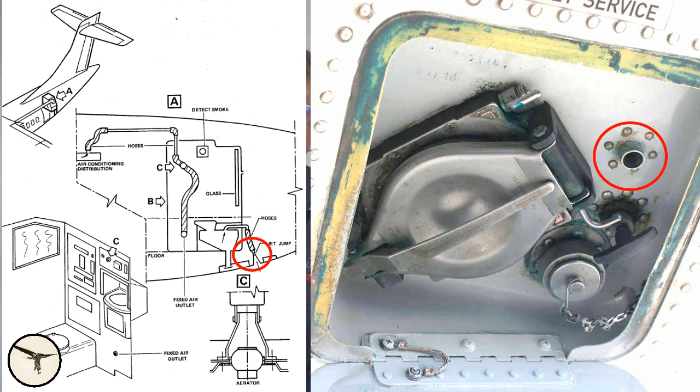We start with the ventilation system. It's totally independent of the air condition and the pressurization systems. The following areas are ventilated: flight compartment or cockpit, forward cargo compartment, avionics compartments, battery compartments, and the lavatory. Starting with the lavatory, it has a duct leading to the atmosphere. When the cabin is pressurized, air is vented out through this duct, eliminating any odors.

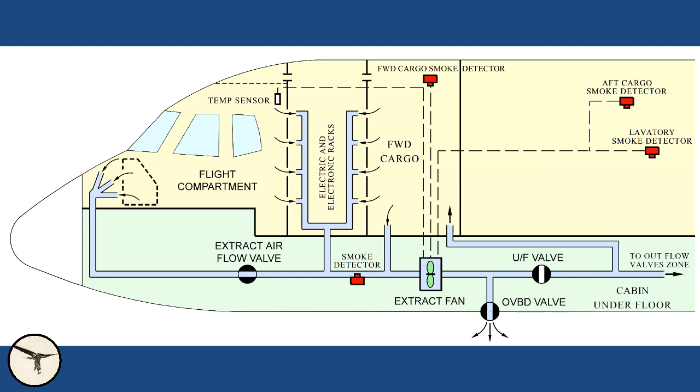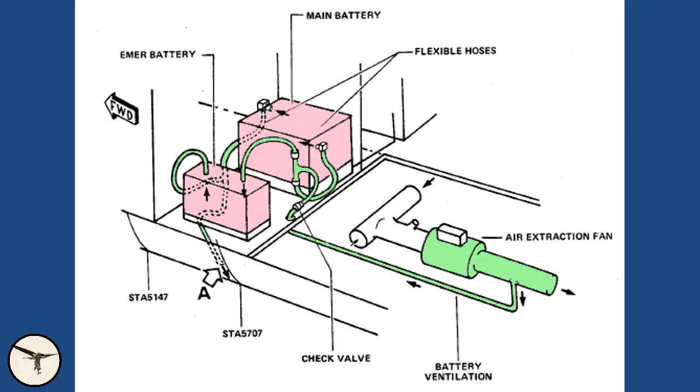Ventilation of the forward part of the aircraft is provided by a fan called the extract fan, which extracts air from the flight deck, forward cargo compartment, and avionic compartments. The extract fan pushes air into the battery compartments via a duct, and from there the air and any fumes from the batteries are discarded into the atmosphere through a tiny hole behind the oxygen bottle discharge indicator.

The job of the extract fan is to keep the avionics cooled. The fan speed is variable. It runs at minimum speed when the temperature in the cockpit is below 20 degrees, and at maximum speed when the temperature is above 52 degrees.

Downstream of the extract fan there are two valves: the overboard valve, which discharges air overboard, and the underfloor valve, which transfers air to the area under the cabin floor. From there, the air enters the recirculation fans or is discharged overboard by the outflow valves, which are controlled by the pressurization system. I will come back to that soon.

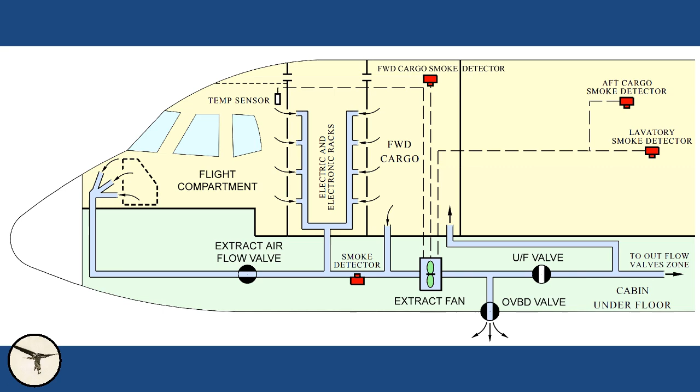The extract fan is very strong. When the overboard valve is open, you must remember to keep the communication hatch open before the cabin door is closed. Otherwise, the extract fan will create a strong suction that will pop your ears when the door is closed. When the doors are closed and the communication hatch is open, the extract fan will cause a strong airflow through the communication hatch. It's pleasant when it's warm outside, but less comfortable when it's minus 20.

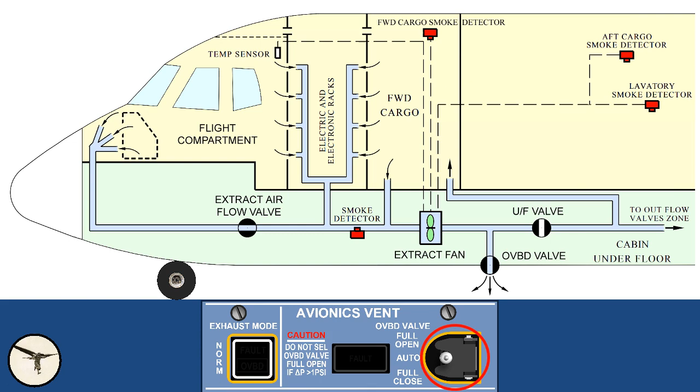The overboard valve is controlled from this panel. When the exhaust mode push button is in normal position and the overboard valve selector switch is in auto, the overboard valve is open as long as the aircraft is on the ground and engine number 1 is not running. When you have started engine number 1, the overboard valve will close, and it will remain closed until you have landed and shut down engine number 1. The engine is considered to be running when the oil pressure is 40 psi or higher.

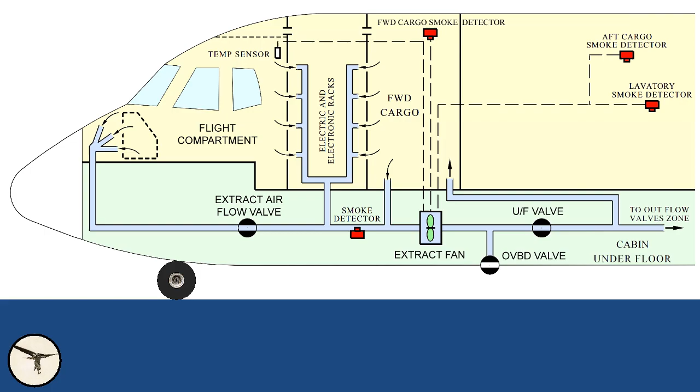The underfloor valve is automatic and follows a simple logic. When the overboard valve is open, the underfloor valve is closed. When the overboard valve is closed, the underfloor valve is open. After engine number 1 has been started, the overboard valve will close, and you can close the communication hatch.

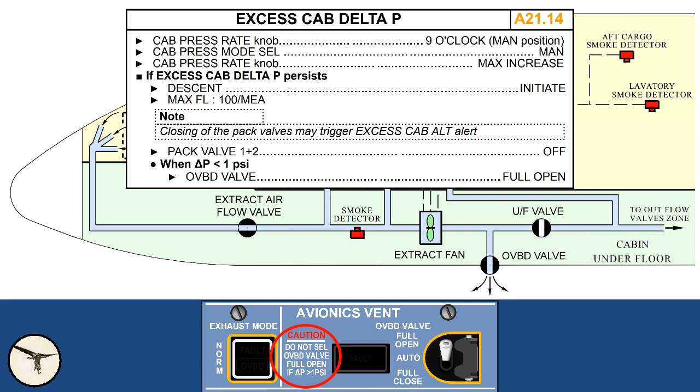The overboard valve selector switch has two other positions: full open and full close. Full open is used when the checklist calls for it, for example before landing with a pressurization problem. But you must be careful: the differential pressure must not exceed 1 psi, or you will hurt your ears.

Full close might be used when you want to heat a cold cabin, as it allows heated air to return to the cabin. It will also prevent the strong draft of air through the communication hatch after the cabin door has been closed. However, you must remember to set the overboard valve back to auto after engine 1 has been started, because the normal checklist does not cover this.

The avionics vent fault light illuminates when there is a disagreement between the position of the overboard valve and the selector switch, including when the overboard valve is closing and opening.

The primary function of the exhaust mode push button is to control the extract fan. When the push button is on, the extract fan will run as long as it's powered.

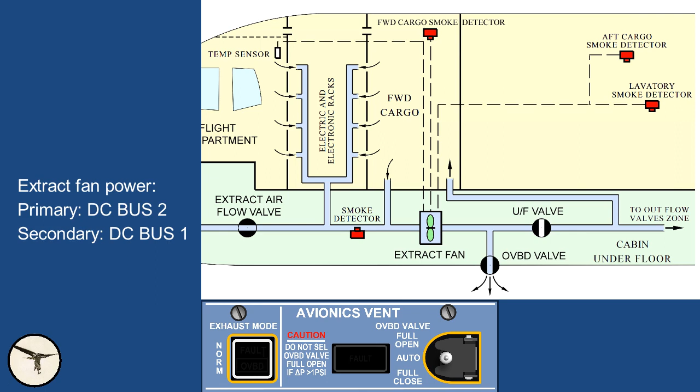The primary power source is DC bus 2. Backup power is provided by DC bus 1.

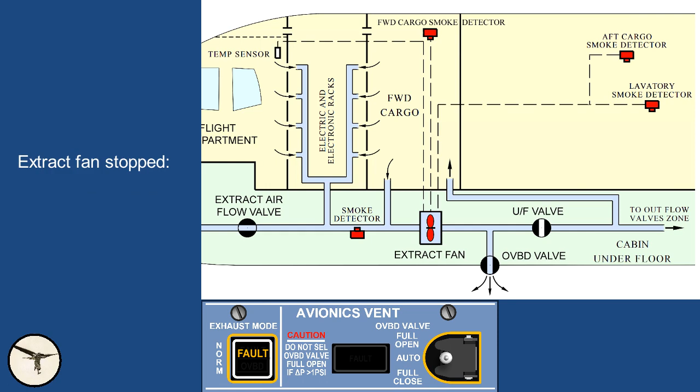An exhaust mode fault light indicates that the extract fan has stopped because of loss of electrical power, too low fan RPM, excessive fan motor temperature, or smoke alert.

The extract fan is also inhibited from running for 120 seconds after engine start. This ensures that the air condition is stabilized before the extract fan starts.

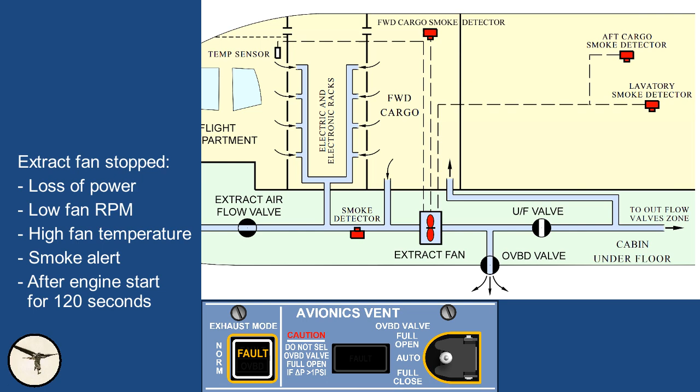When the exhaust mode push button is set to overboard, the extract fan will stop, and the overboard valve will open partially, and the underfloor valve will close. The partial opening of the overboard valve allows air to be vented out, but prevents loss of cabin pressure.

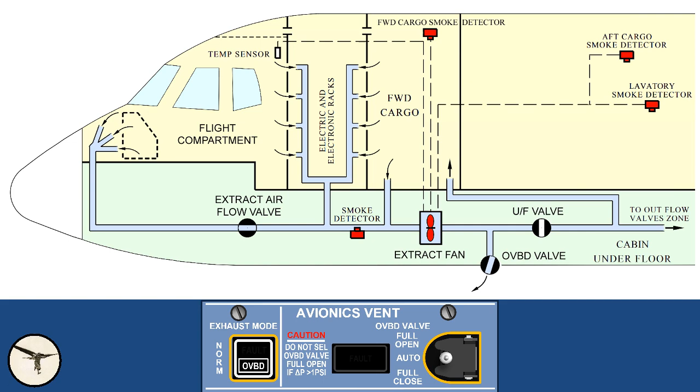This allows ventilation of the avionics when the fan has failed, and evacuation of smoke and odors from the forward areas of the aircraft. And talking about smoke, if there is smoke in the forward cargo compartment, the procedure is...

to pull a handle at the right-hand side panel. This closes the extract airflow valve, which prevents smoke from entering the flight deck.

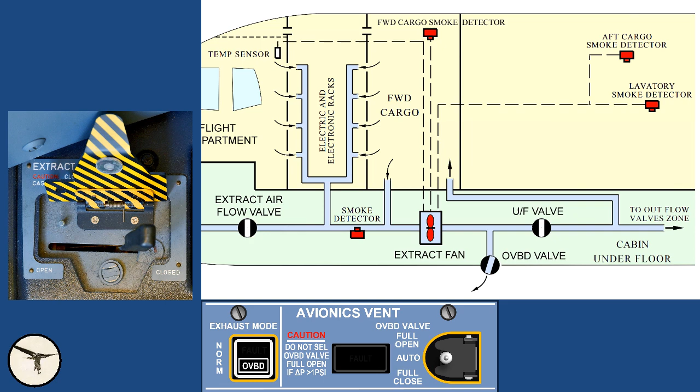When the aircraft is parked and connected to a GPU, a mechanic horn will sound when you select overboard mode. The horn is installed in the nose gear bay and is quite loud.

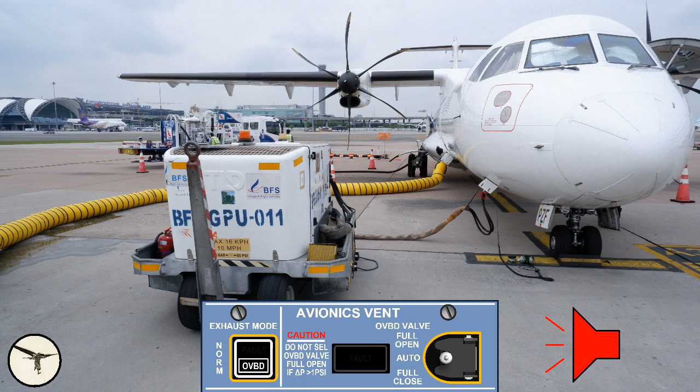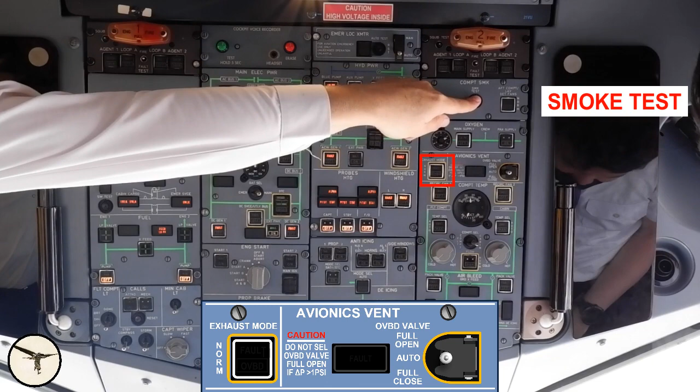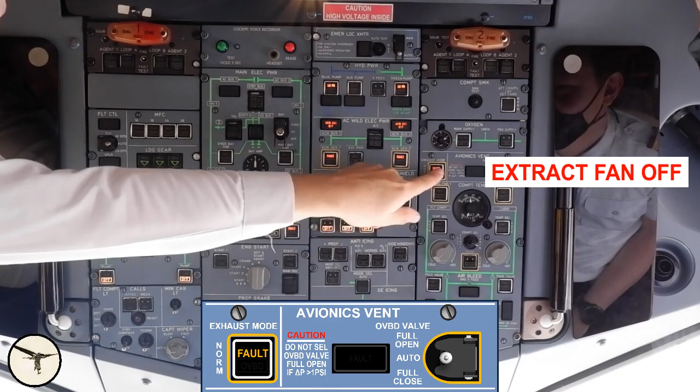When we test the smoke alert systems, the extract fan stops. After a smoke test is completed, the extract fan is started by resetting the exhaust mode push button. This activates the mechanic call horn, so we do that reset rather quickly.

We can also activate the mechanic call with a push button in the cockpit when you want attention from the ground crew.

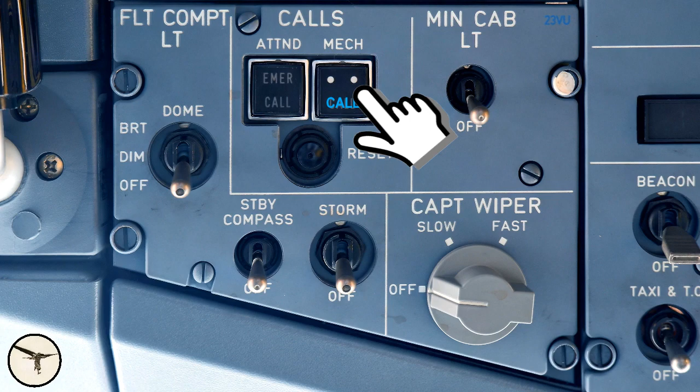Are you with me so far? Good.

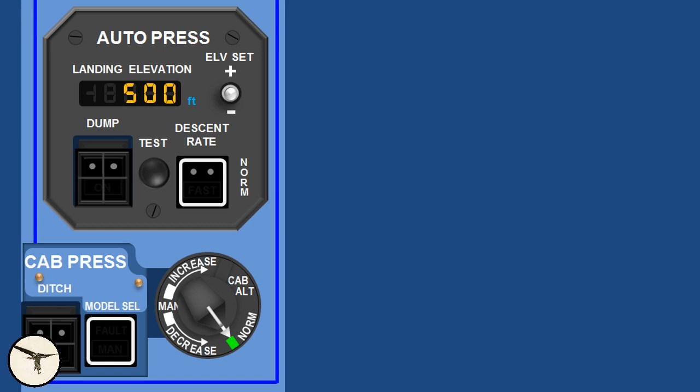The outflow valve on the right side is electro-pneumatic and is regulated by the automatic pressurization controller, which acts on the torque motor on the valve.

The outflow valve on the left side is pneumatic and follows the movement of the electro-pneumatic valve. In other words, during normal operation, both outflow valves move together.

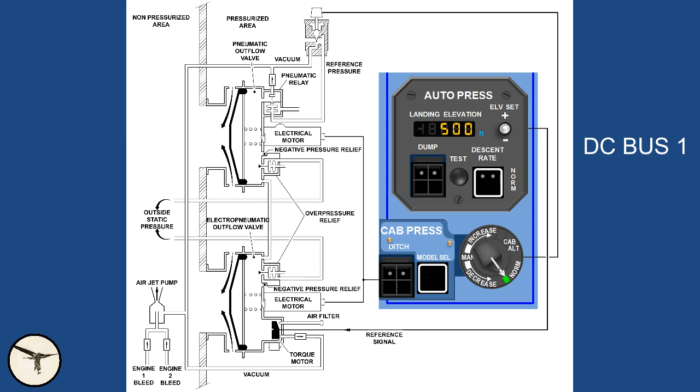The automatic pressurization controller is powered by DC bus 1. In case of loss of this bus or a failure to the controller, both outflow valves will close.

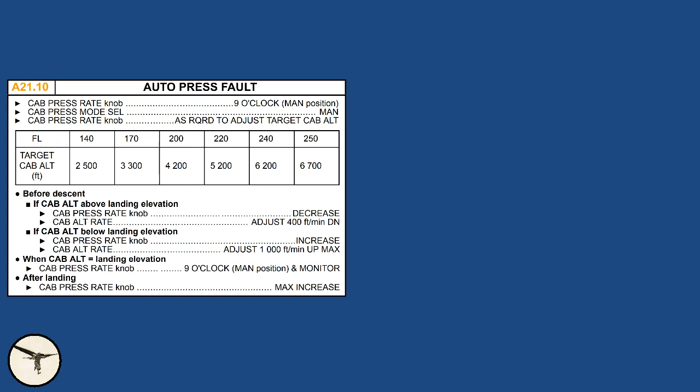This causes the cabin pressure to increase. Therefore, the checklists involving auto pressure failure or loss of DC bus 1 will quickly point you towards the procedure to activate the manual pressurization control.

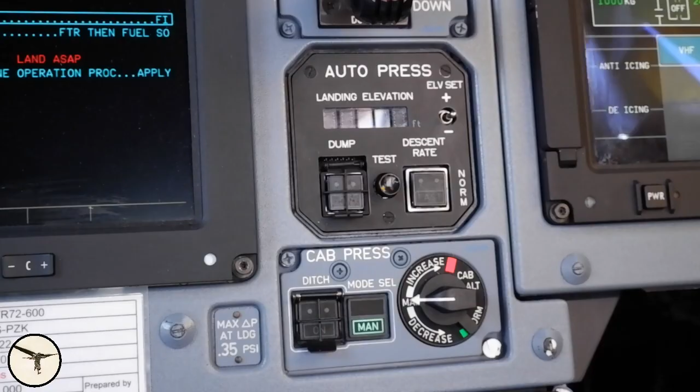Turn the pressure rate knob to 9 o'clock and set the cabin mode pressure push button to manual. The pressure rate knob is attached to a needle valve on the pneumatic outflow valve.

During manual operation, the electro-pneumatic valve remains closed. Manual control requires a lot of attention from pilot monitoring because it's fully pneumatic and reacts slowly to changes. Therefore, it's a popular scenario among sadistic simulator instructors, including me.

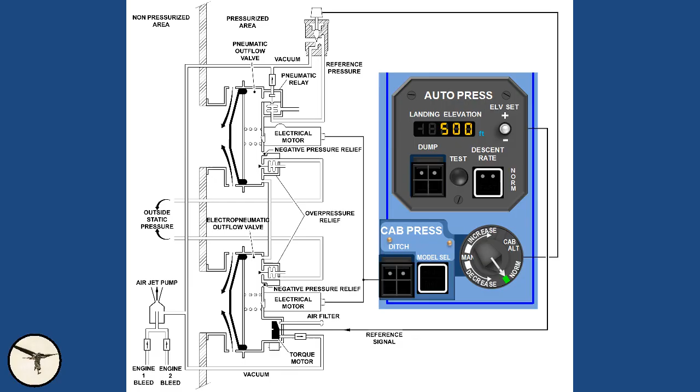The control panel has 2 guarded push buttons, dump and ditch. Dump mode opens both outflow valves. It's used only for emergency evacuation to ensure that the differential pressure is 0 before opening the doors.

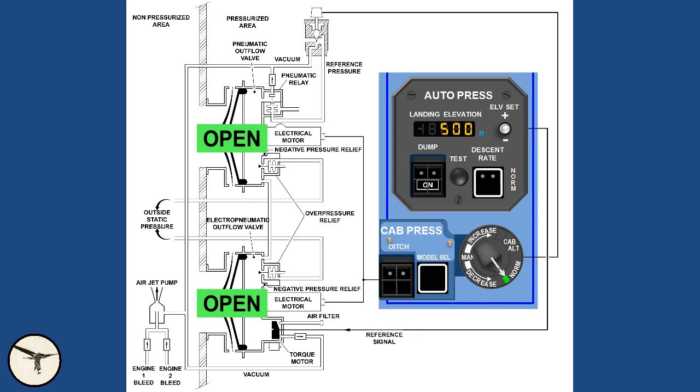Ditch mode closes the outflow valves. It's only used for landing on water, to prevent water from leaking into the cabin.

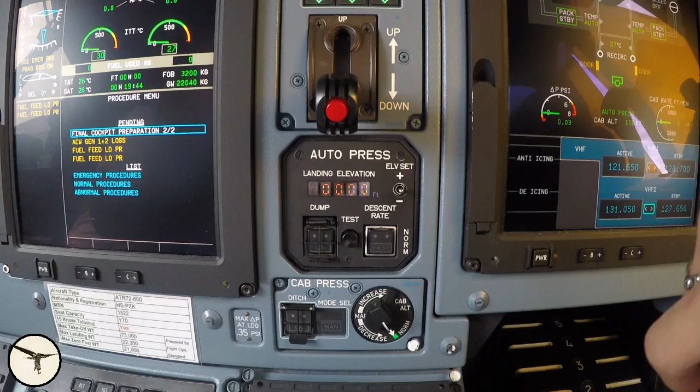The automatic pressurization controller is easy to use. Before the first flight of the day, you press the test button and observe that the display flashes between 18800 and -8800. Before each flight, you set the landing elevation of your destination.

There are two ways to set the landing elevation. One, you round up the elevation to the next 100 feet, so if the elevation is 811 feet, you set 900. Two, you round the elevation up or down to the nearest 100 feet, so if the elevation is 811 feet, you set 800. Both methods work equally well.

At takeoff and landing, the cabin pressure is adjusted to local QNH, but only when air data computer number 1 is working. Without air data computer number 1, the landing elevation must be set to the airport's pressure altitude. For example, if landing elevation is 811 feet and QNH is 1023 hectopascal, then the pressure altitude is 300 feet low, in other words, 511 feet.

Then the automatic pressurization controller does the rest. Before takeoff, the bleed valves are, depending on the operating procedure, selected on or off. In the latter situation, the bleed valves are selected on after the landing gear is selected up.

There are three indicators for the cabin: cabin pressure altitude in feet, cabin rate of climb in feet per minute, and the difference in air pressure between the cabin and the atmosphere outside in psi.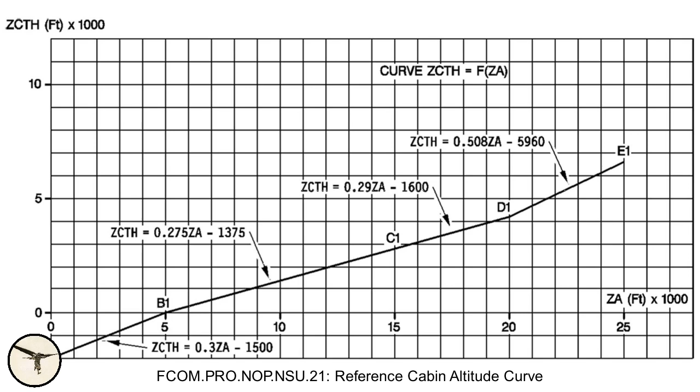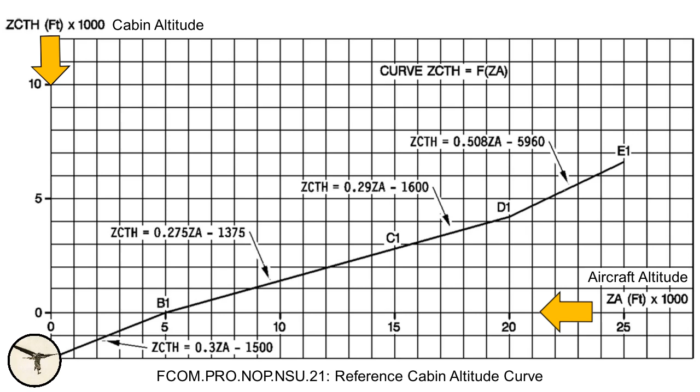This graph is the reference cabin altitude curve. It shows the relationship between aircraft altitude, which is on the horizontal line, and the cabin altitude, which is on the vertical line. With the help of this graph, I will show you how the automatic pressurization controller works. As an example, I will use a flight from Bangkok, elevation 5 feet, to Lampang, elevation 811 feet. Afterwards, I will show a video from that flight, so you can see how it works in real time.

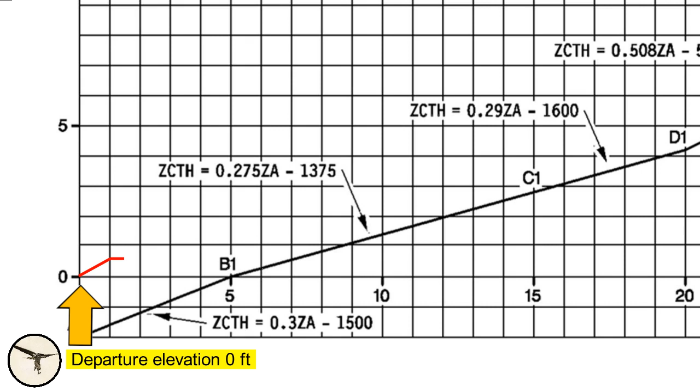When the aircraft is on the ground, the outflow valves are open. And when the aircraft has become airborne, the outflow valves start to close. This takes about 30 seconds, and in the meanwhile, the cabin will climb with the aircraft. Then the cabin altitude descends back to the elevation of the departure airport, which is maintained until the aircraft reaches 3,500 feet above departure airfield elevation.

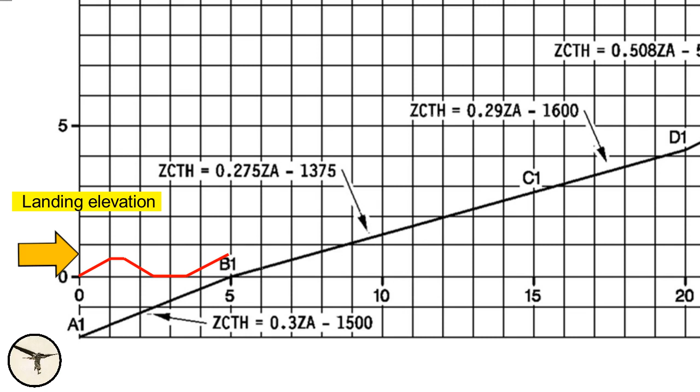Why is it so? Well, if an emergency return to the departure airport is required, the flight crew doesn't have to worry about setting the new landing elevation. Then, when the aircraft climbs through 3,500 feet above departure airport elevation, the cabin pressure will climb or descend towards the landing elevation at your destination. Then, as the aircraft climbs higher, the cabin altitude will cross the line on the graph, and from then on, the cabin altitude will follow this line.

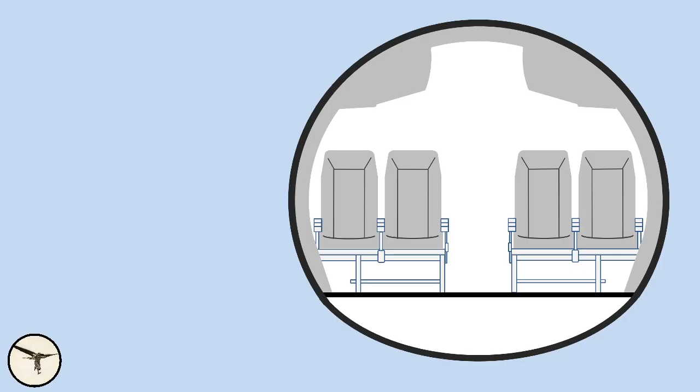Normal cabin rate of climb is 30% of aircraft rate of climb. Maximum rate is 550 feet per minute, up to 20,000 feet. Above 20,000 feet, the rate is 50% of aircraft rate of climb, or maximum 620 feet per minute. At sea level, the air pressure is 14.7 psi.

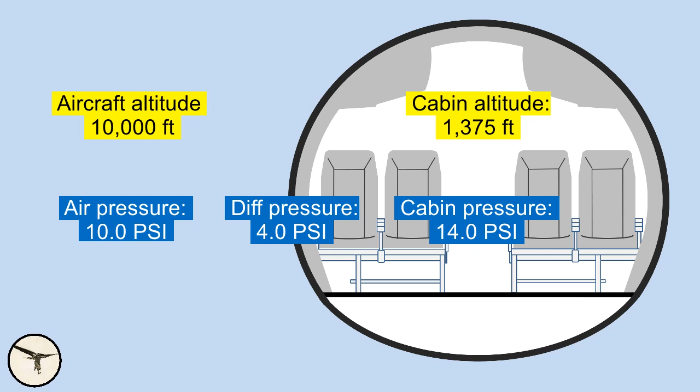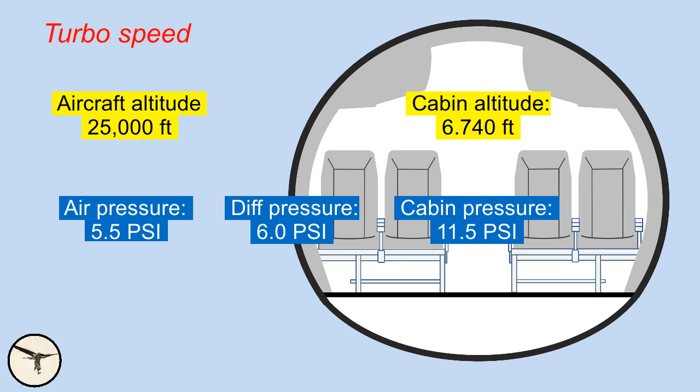The cabin can maintain 0 feet until the aircraft passes 5,000 feet. The differential pressure is then 2.5 psi. At 10,000 feet, the cabin altitude is 1,375 feet, and the differential pressure is 4 psi. At 15,000 feet, the cabin altitude is 2,750 feet, and the differential pressure is 5 psi. At 20,000 feet, the cabin altitude is 4,200 feet, and the differential pressure is 5.9 psi. And at 25,000 feet, the cabin altitude is 6,740 feet, and the differential pressure remains at 6 psi.

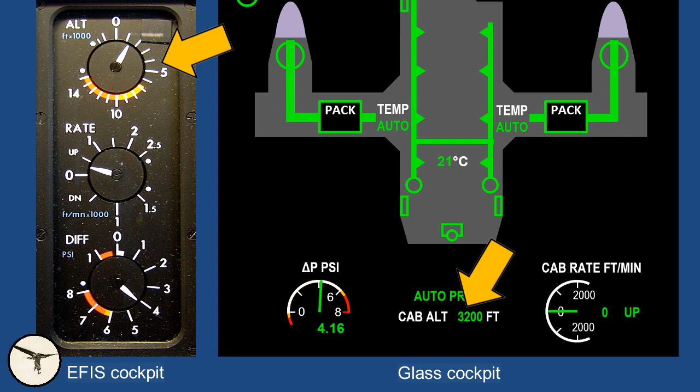As I said, indicated cabin altitude is pressure altitude. Therefore, it will vary with the QNH.

During descent, the cabin descends at 400 feet per minute. When pushing the descent rate push button, fast mode is activated, and cabin rate of descent is 500 feet per minute. You only need that if the aircraft descends at a high rate, well above 2,000 feet per minute, for a long period of time.

Before landing, cabin pressure is regulated to landing elevation minus 300 feet. This ensures a slightly higher cabin pressure than the atmospheric pressure, preventing the cabin pressure from oscillating back and forth. After touchdown, the outflow valves start to open, regulating the cabin rate of climb to 550 feet per minute.

Now, let's have a look at the cabin pressure on an actual flight from Bangkok to Lampang. Before we start the engines, we set the landing elevation to 800 feet.

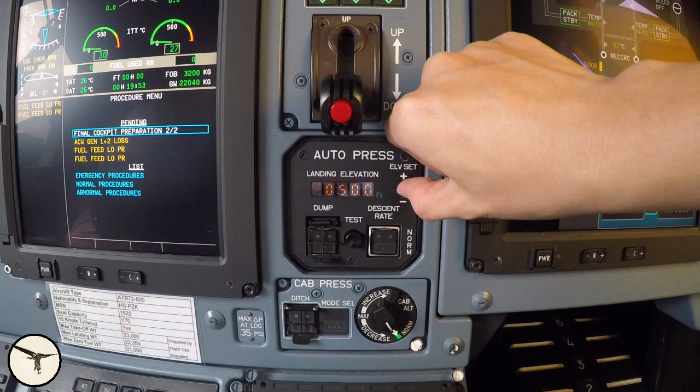Okay, let's roll the camera.

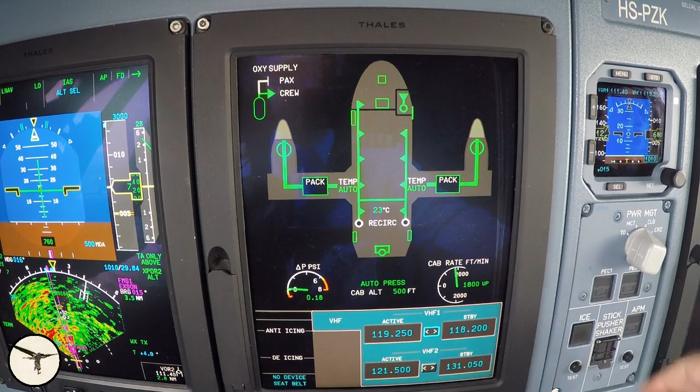Shortly after we become airborne, the cabin starts to climb. As you can see, the cabin rate of climb reaches a maximum of 1,800 feet per minute, and the cabin climbs up to 600 feet. Then the outflow valves start to close, and the cabin rate of climb starts to decline. Then the cabin altitude descends back to the elevation of the departure airport.

When the aircraft climbs through 3,500 feet above the airport, the cabin altitude starts to climb to landing elevation, 800 feet minus 300 feet. In this case, the cabin stabilizes at 600 feet. That's acceptable too.

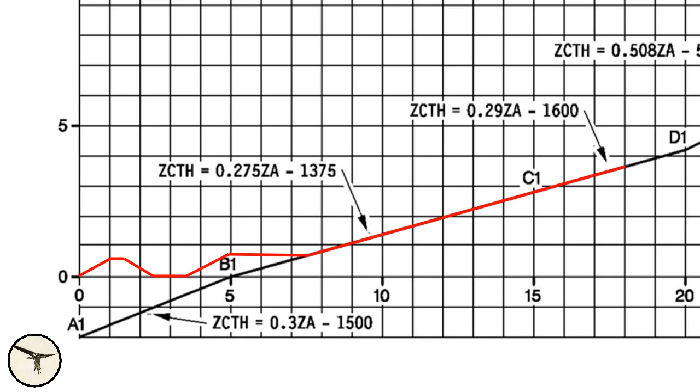According to this graph, the cabin will start to climb when we are passing about 7,500 feet. Yep, that works.

Passing 10,000 feet, the differential pressure is 4 psi and the cabin altitude is 1,300 feet.

When leveling off at flight level 180, or 18,000 feet, the cabin altitude is 3,500 feet and the differential pressure is 5.62 psi.

During descent, the cabin descends at 400 feet per minute. When the cabin altitude reaches landing elevation minus 300 feet, the cabin levels off. So in this case, the cabin levels off at 500 feet. As the aircraft descends towards the runway, the differential pressure decreases.

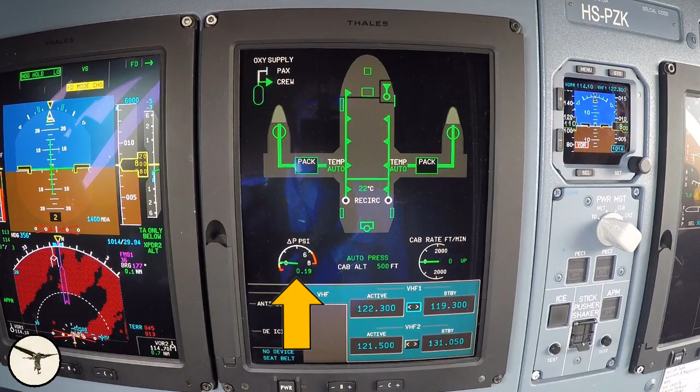Approaching minimums. 50, 40, 30. At touchdown, 20, the differential pressure shows 0.19 psi, which means the cabin pressure is slightly higher than the pressure outside.

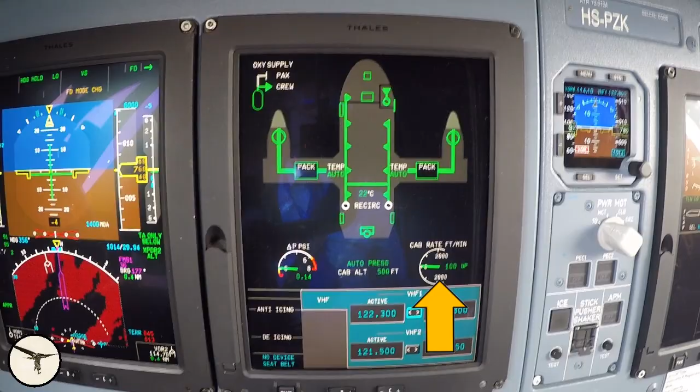After touchdown, the cabin starts to climb, and boy, the yoke pushed the camera away as we landed, but okay. When we are slowed down and the gust lock is on, you can see the cabin is climbing at 500 feet per minute until it reaches 800.

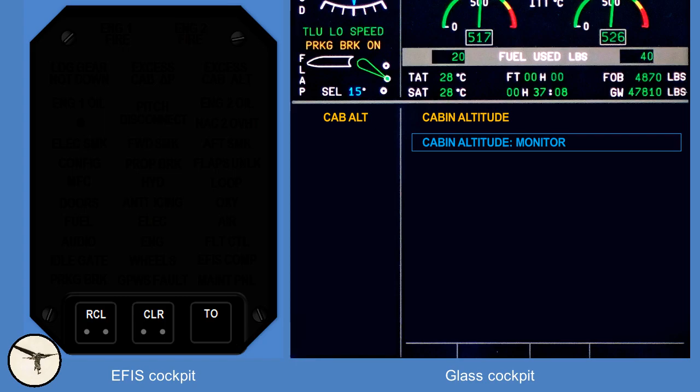If the cabin pressure becomes too low, an excessive cabin altitude alert is issued. The alert is triggered when the cabin altitude exceeds 10,000 feet. On aircraft with glass cockpit, there is an additional caution when the cabin altitude exceeds 9,500 feet. On aircraft with high altitude modification, the alert threshold is 15,000 feet.

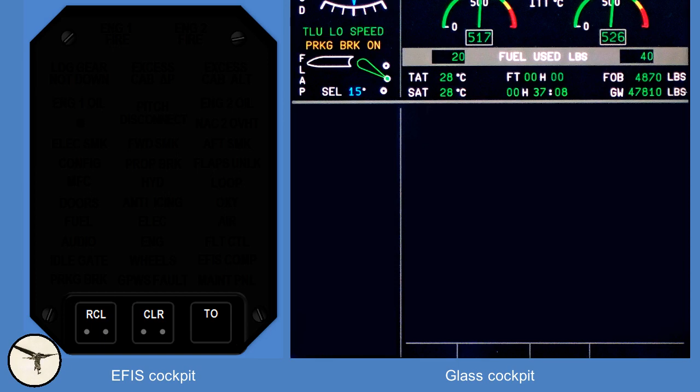At the other end of the scale, if the cabin pressure becomes too high, an excess cabin delta pressure alert is triggered. Unless the condition is controlled, the consequences can be dramatic.

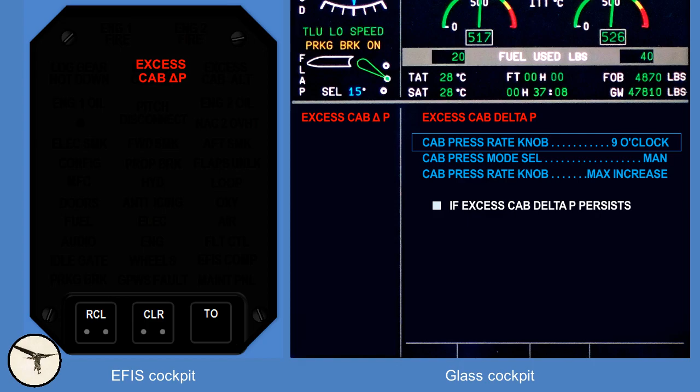Thankfully, the aircraft landed safely and the first officer recovered from his injuries. At that time, the checklist for excessive differential cabin pressure looked like this. You take manual control of the pressurization and descend if necessary.

After learning about this incident, I asked several pilots the following question: What do you do if the differential pressure becomes too high and you cannot control it? Do you know the answer? I'll give you a few seconds to think it over.

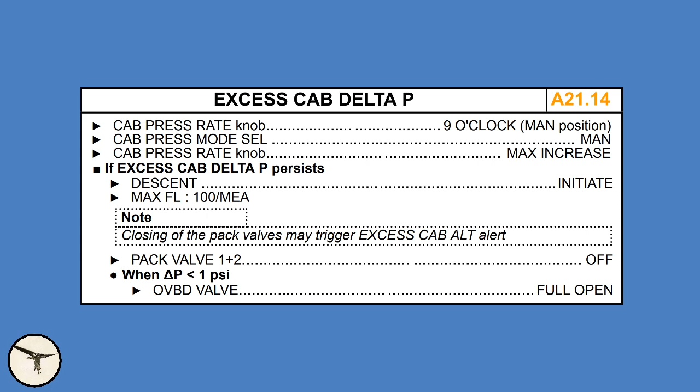If you found the answer, congratulations, you have a very good understanding of the system. After this incident, a new line was added to the checklist: Pack valve 1 and 2 off. This is logical because when you stop the airflow into the cabin, the pressure cannot be increased anymore.

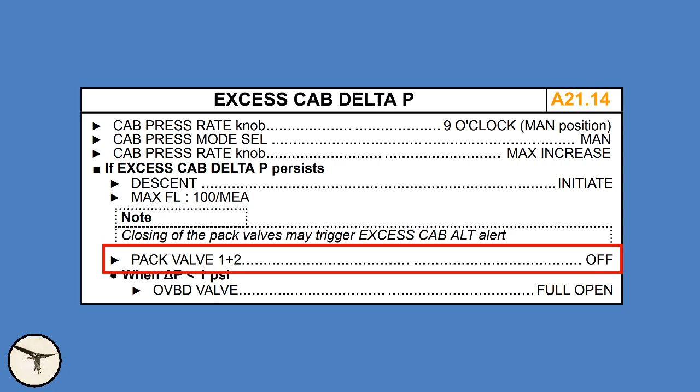Regardless of what kind of aircraft you're flying, whether it's a Cessna 172 or a Boeing 747, knowing the aircraft system is always important. And that's all for this time.